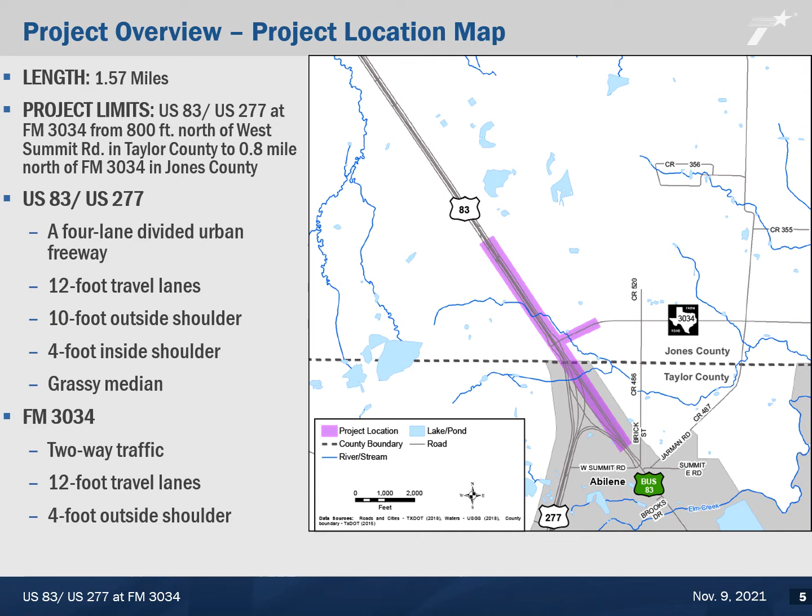The proposed build improvements would improve mobility and enhance safety by constructing a new US 83/US 277 overpass bridge at the intersection with FM 3034. This would remove the current at-grade crossover intersection. To make these improvements, the US 83 main lanes and frontage roads would be reconstructed, but remain a 4-lane divided highway with 2-lane frontage roads.

To accommodate the new FM 3034 exit and entrance ramps to and from US 83, FM 3034 would be realigned to the north of the existing intersection, allowing for appropriate weaving distance for highway traffic movements.

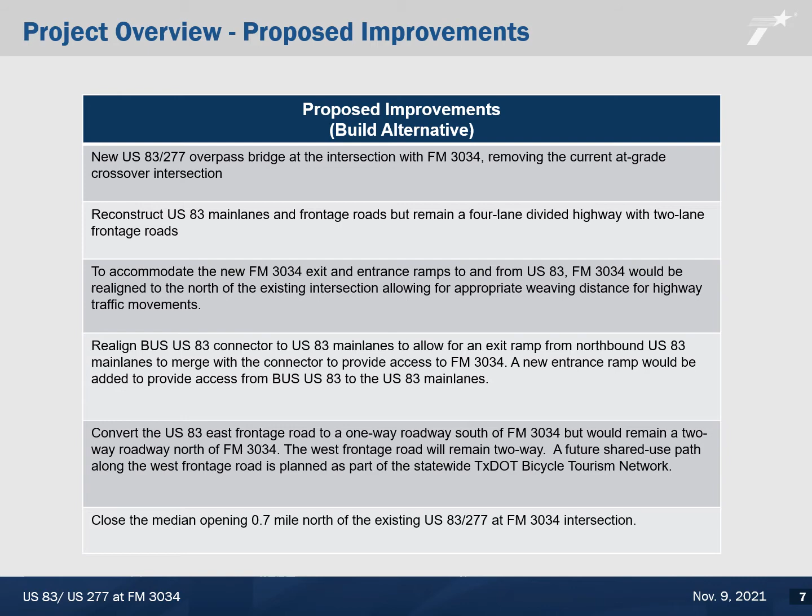The proposed improvements on the previous slide will be highlighted in greater detail in the following slides. This slide highlights the proposed project with two 12-foot US 83 main lanes in each direction, northbound and southbound, one 14-foot lane for exit and entrance ramps, and two 12-foot frontage road lanes.

The westbound frontage road would remain two-way, while it is proposed to convert the east frontage road to one-way, south of FM 3034, but remain a two-way operation north of FM 3034. The proposed shared use path next to the westbound frontage road would be a future path connecting with the statewide TxDOT bicycle tourism network.

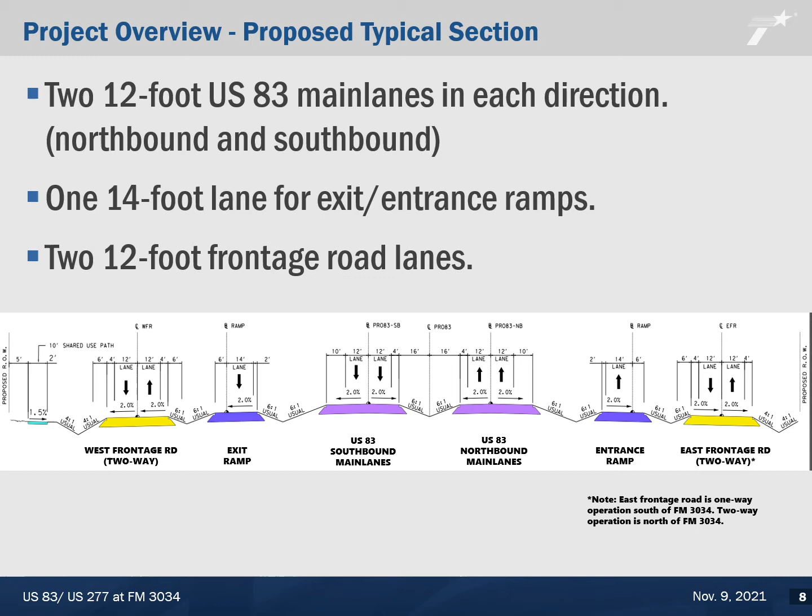This general overview highlights the US 83 main lanes and ramps, showing grade separation of the main lanes at the proposed FM 3034 intersection with the main lanes above and over FM 3034. Entrance and exit ramps would be added to the northbound and southbound main lanes.

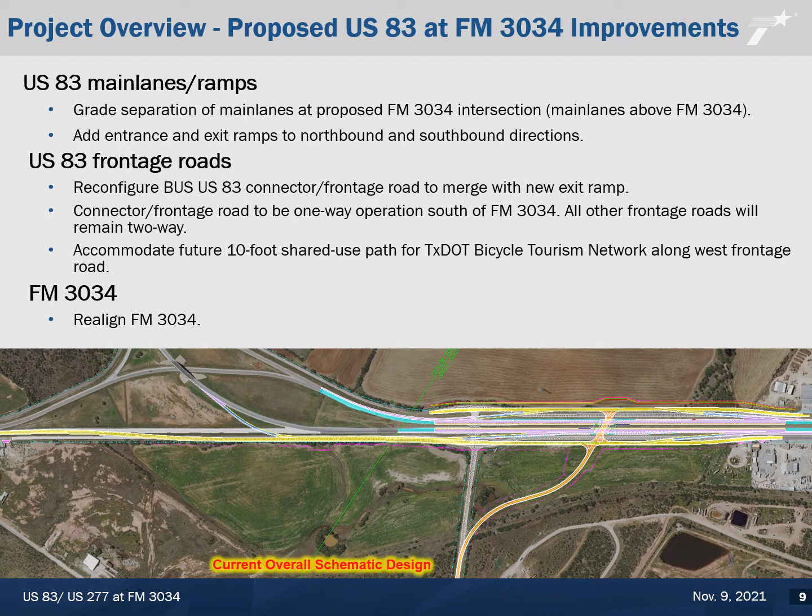On the US 83 frontage roads, it is proposed to reconfigure the business US 83 connector frontage road to merge with the new exit ramp. The connector frontage road would be a one-way operation south of FM 3034. All other frontage roads will remain two-way. The design would accommodate a future 10-foot shared use path for the TxDOT bicycle tourism network along the west frontage road. FM 3034 would be realigned at US 83/US 277 to accommodate the new connector ramp.

This enhanced view provides a closer inspection of the proposed connector ramp and frontage road improvements. The blue line in the schematic shows the proposed exit ramp from the northbound US 83/US 277 main lanes. The yellow line shows the realigned northbound business US 83 connector frontage road.

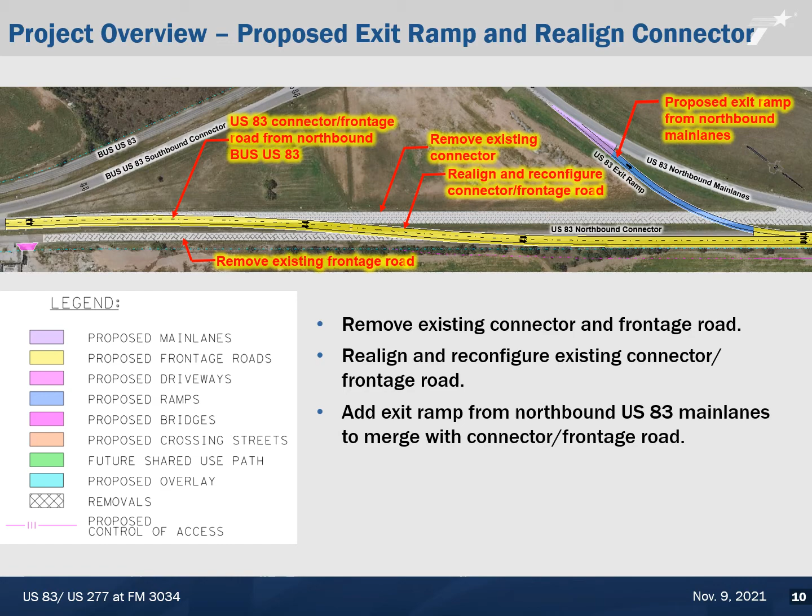This view highlights the removal of the at-grade FM 3034 intersection with hash marks, and the orange shows the proposed relocation of the FM 3034 intersection further north as a bridge grade-separated intersection. The US 83 bridges in purple would be built over FM 3034 to improve mobility and enhance safety.

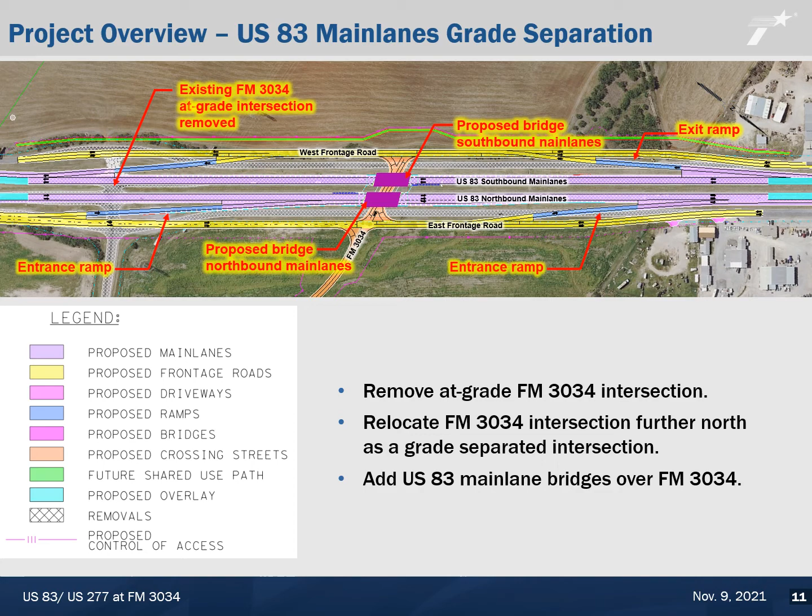The blue lines in this image show the proposed new entrance ramps south of the FM 3034 intersection to the US 83 northbound and southbound main lanes. The lavender lines show the reconstructed US 83 main lanes. The yellow lines identify the west and east frontage roads.

The west frontage road would remain two-way. The east frontage road would convert to one-way south of FM 3034 and would remain two-way north of FM 3034. A proposed future 10-foot shared use path for TxDOT's bicycle tourism network, shown in green, would be planned along the west frontage road.

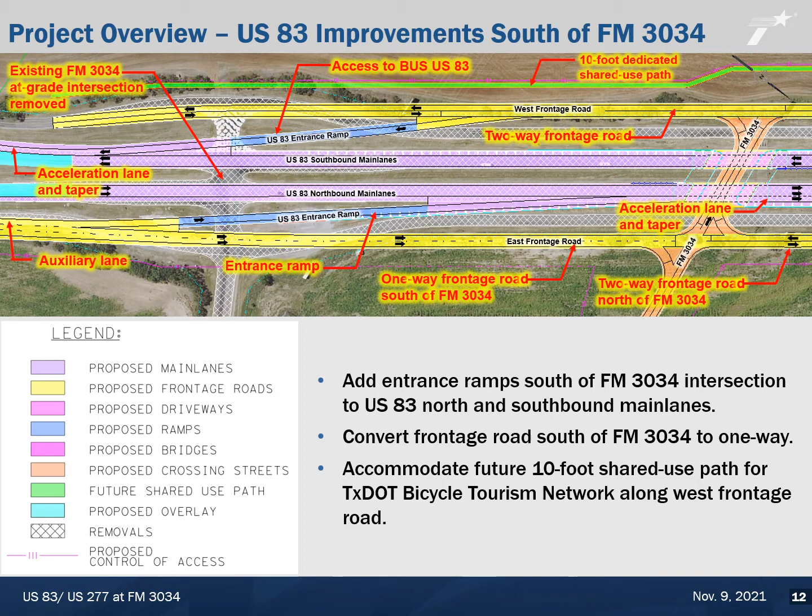The existing median opening 0.7 mile north of the existing US 83/US 277 at FM 3034 intersection is proposed to be closed, shown in the black hash marks. Due to the close proximity of the existing median opening to the US 83 northbound entrance ramp and acceleration lane, the median opening closure will improve safety.

The west frontage road would remain two-way, while the east frontage road would remain two-way north of FM 3034.

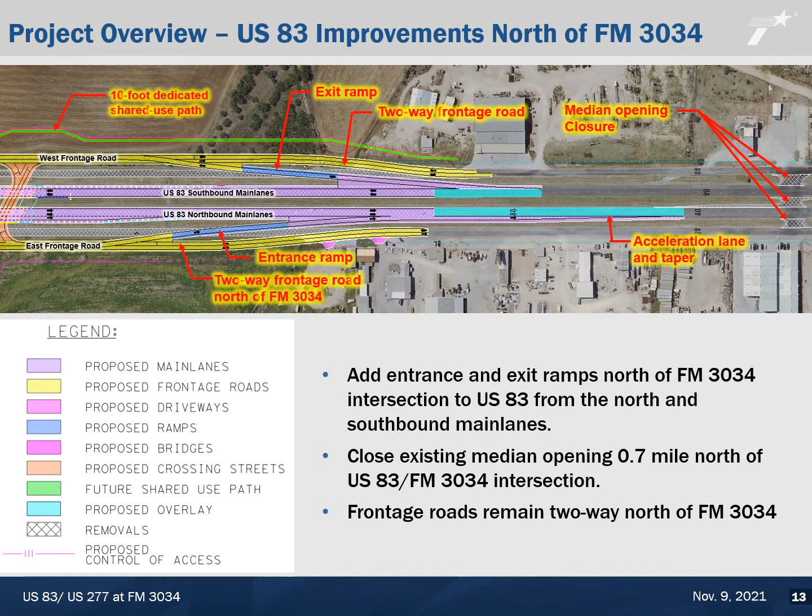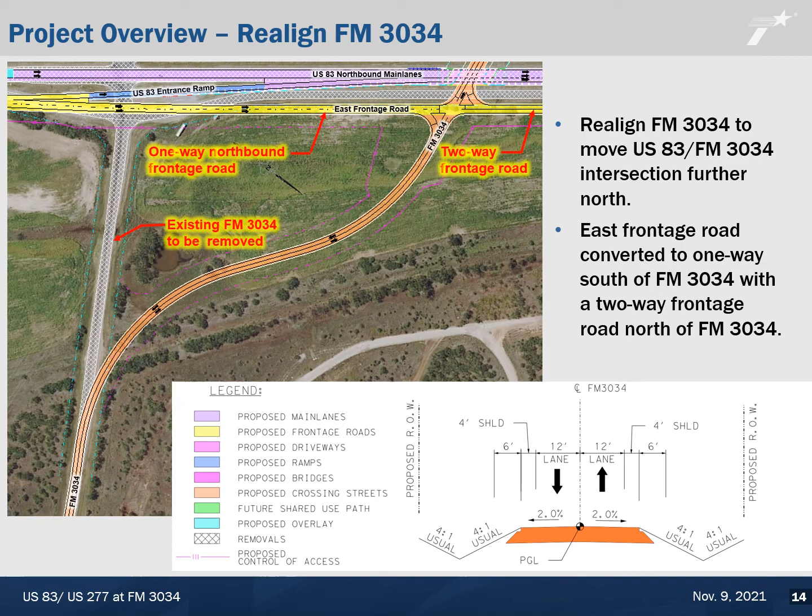For this virtual public meeting with an in-person option to engage stakeholders and seek input, elected and public officials were mailed a notice, comment form, and fact sheet on Wednesday, October 20th, 2021. Adjoining property owners identified by using county tax rolls were mailed a notice, comment form, and fact sheet on Friday, October 22nd, 2021. Public notices were published on TxDOT's website at www.txdot.gov on October 25th, 2021.

A notice of this public meeting was also published in the Abilene Reporter News on Monday, October 25th, 2021. The TxDOT Abilene District distributed a media release on November 2nd, 2021 to advertise the virtual public meeting and in-person option. You may view TxDOT's technical reports online at www.txdot.gov by searching keywords US 83 at FM 3034.

The US 83 improvement project is anticipated to be federally funded. Due to the project receiving federal funds, TxDOT is required to assess the potential environmental effects of the proposed project. The National Environmental Policy Act, otherwise known as the NEPA review process, provides analysis of the potential impacts to the natural and man-made environment and helps the decision maker make an informed decision on whether or not to proceed with the project.